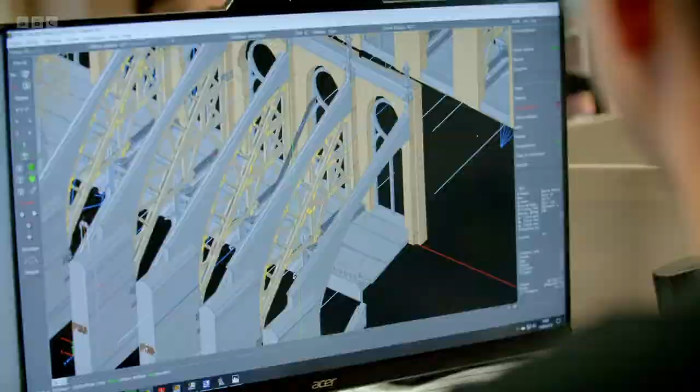But on the 15th of April 2019, disaster strikes. A massive fire rages out of control and tears through the cathedral, leaving it in ruins. Now, a team of master craftspeople and elite engineers battle to save this fragile structure from a catastrophic collapse.

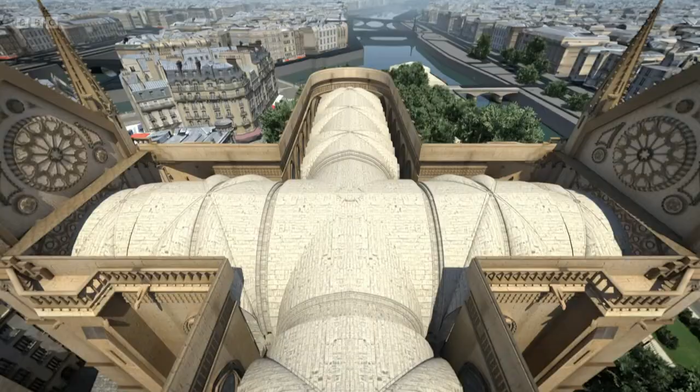The cathedral can hold 9,000 worshippers, and its 33-meter-tall walls contain more than 3,000 square meters of stained glass. The ceiling is a series of domed Gothic vaults that hold up the cathedral from the inside. A complex 500-ton web of timber forms a cross-shaped roof, topped with 1,300 lead tiles, and a 90-meter-tall central spire.

Wrapped around the church are 28 flying buttresses, limestone arches that brace the walls from the outside. And at the front, 2 mighty towers, with 10 massive bronze bells inside, soar over 68 meters into the sky over Paris. The construction took many generations. Architecture was not learned at the university, so the architects and all workers learned mostly on site.

Along the way, there were many setbacks. In 1789, at the height of the French Revolution, anti-Catholic forces destroy parts of the cathedral. A newly secular France leaves Notre Dame in a state of neglect. But when Victor Hugo writes The Hunchback of Notre Dame in 1831, it sparks a £170 million restoration that tops out the cathedral with a new roof and a 750-ton timber and lead spire. And periodic renovations continue to this day.

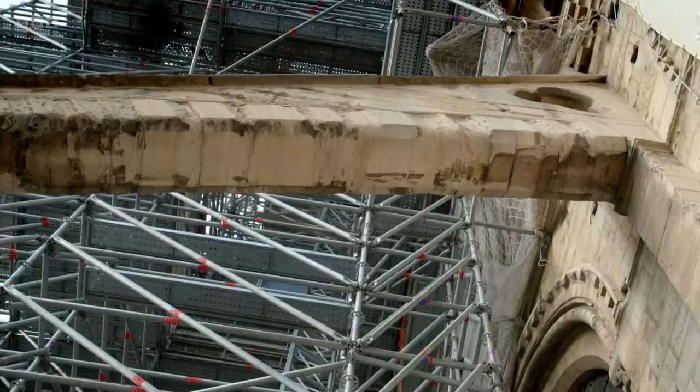On the 15th of April 2019, Notre Dame is wrapped in 500 tons of scaffolding as the cathedral begins a £5 million operation to shore up the spire.

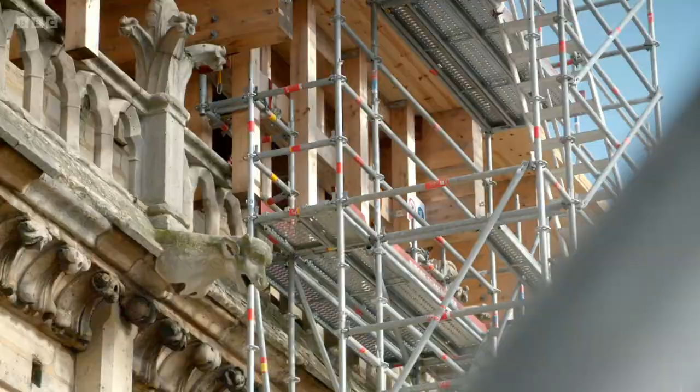Notre Dame's rector, Father Patrick Chauvet, has finished evening worship. His world is about to be turned upside down.

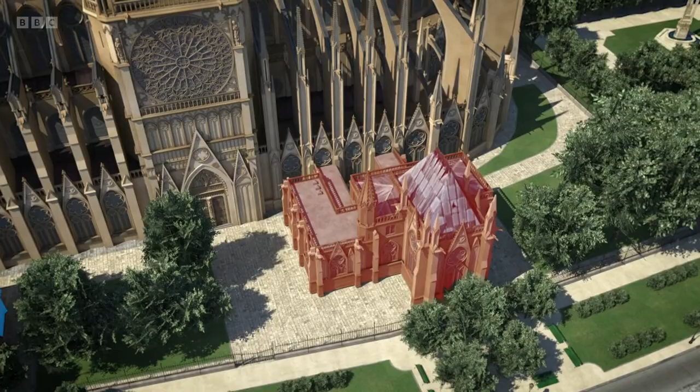At 6:18 p.m., a sensor detects smoke in the medieval roof timbers. The system sends a coded fire alert to the security team. Instead of heading straight for the roof, a guard is dispatched to the sacristy building nearby to check for a fire, but he finds nothing. He climbs up into the church attic, but by the time he gets there, he's too late. The fire has been burning for almost 30 minutes and spread across the roof.

And there was this horrifyingly huge plume of smoke billowing up out of it. It was surreal. I'd never seen anything like that before. You saw the fire trucks come up alongside the cathedral and ladders went up and the hoses came out. You could see that the ladders were just too small for a building of this size, and the hoses were not nearly big enough for this kind of blaze. It was tragic. The resources that were available were not going to be what was needed to bring this thing under control.

A lot of us realized that this fire was just going to ravage the cathedral.

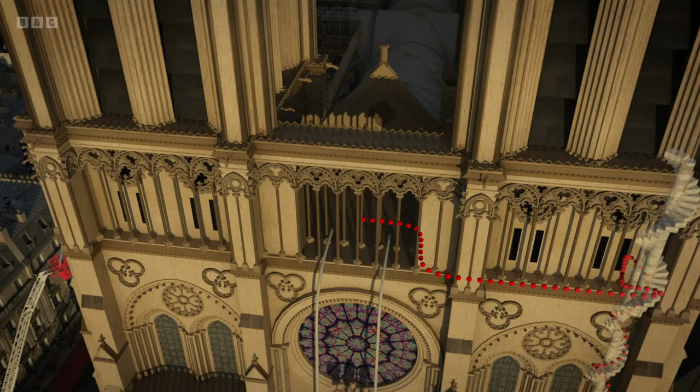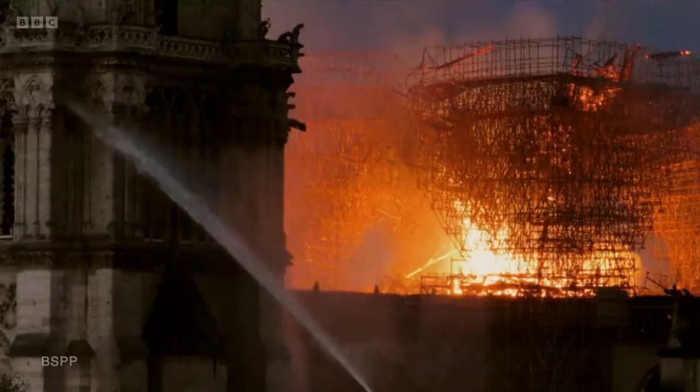And despite their efforts, the timber frame holding the bells has caught fire and could trigger the destruction of the cathedral at any moment. So the team must drag their hoses to the top of the tower and soak the timber frame to prevent the unthinkable. Throughout the night, the fate of Notre Dame hangs in the balance. Eventually, the firefighters get the upper hand. The flames have been beaten back and only glowing embers light up the night sky.

Nobody knows how the fire started. An investigation begins. But for now, the urgent question: how damaged is the structure and can it ever be rebuilt? President Macron pledges to restore the cathedral in 5 years.

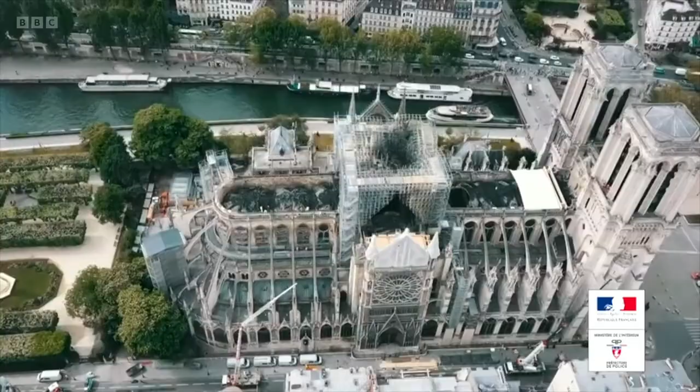Daylight reveals the full extent of the terrible destruction wrought by the fire. The oak roof and spire are completely destroyed. Toxic lead that covered the roof has been sprayed into the air, contaminating the site. Burned roof timbers cover the vaulting. 3 gaping holes in the stone vaults weaken the entire structure. And the 500-ton scorched carcass of scaffolding could collapse at any moment. Something unthinkable to those tasked with preserving France's rich cultural heritage.

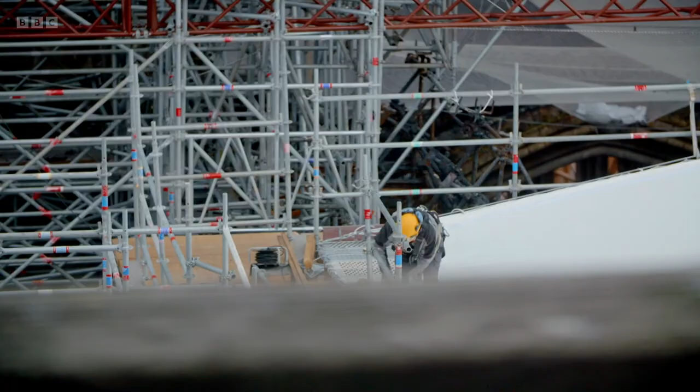Philippe Villeneuve is in charge of historic monuments in France. This is the cathedral that inspired him to become an architect.

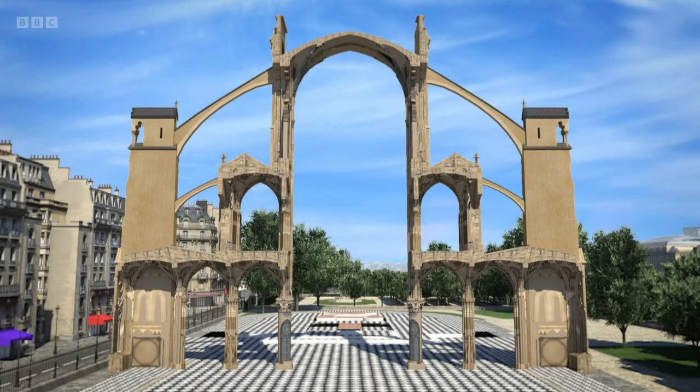The stricken cathedral is a giant house of cards. If the stone vaulting collapses, the weight of the buttresses will push in the 33-meter-high walls, and Notre Dame will be no more.

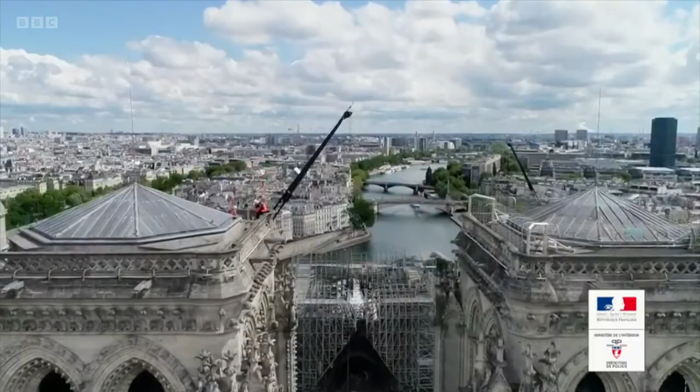There are evacuations like this each week that slow progress.

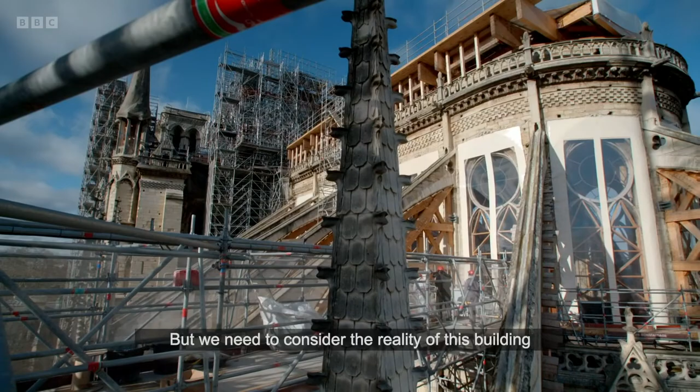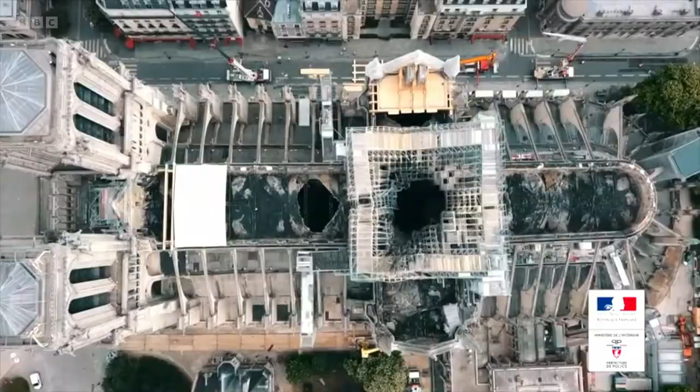To avert a catastrophic collapse, engineers could build a steel skeleton inside the nave to brace the walls. Then, even if the vaulting caves in, the walls of Notre Dame would stay standing. But it's far too dangerous for workers to erect steelwork beneath the compromised structure.

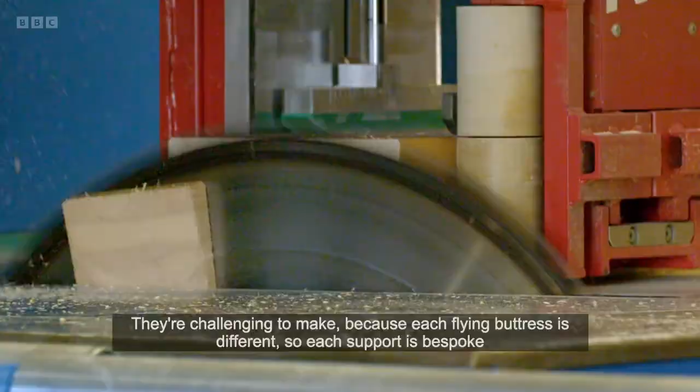Workers at this specialized factory race to cut and assemble around 225 tons of timber to create the massive supports Philippe's team needs to prop up the vaults. It's critical each support fits perfectly beneath each flying buttress to hold its weight.

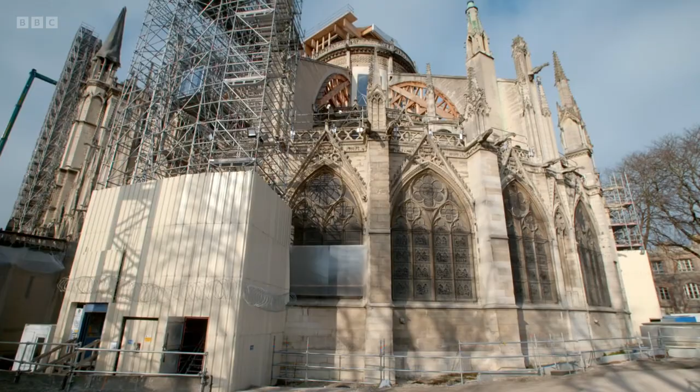Working around and inside this space is a logistical nightmare. 200 tons of lead cladding covered the cathedral roof. This was mostly melted during the fire, and now toxic lead dust covers every surface. The work site is highly contaminated.

Until the site is cleaned, team members must wear full protective clothing to pass into the contaminated zone. When leaving site, they undress, discard all clothing, carefully wash equipment, then shower themselves. Only then can they go back to the clean area, even for a lunch break.

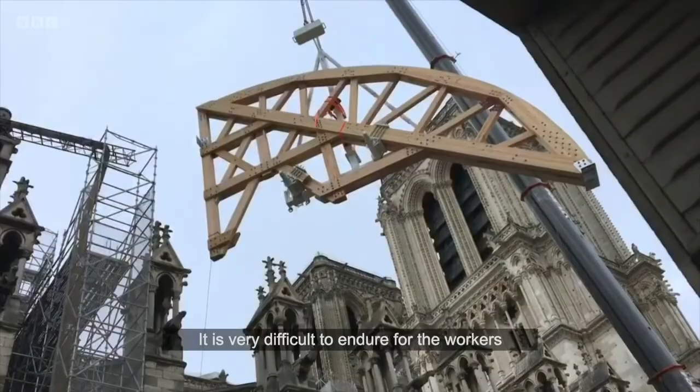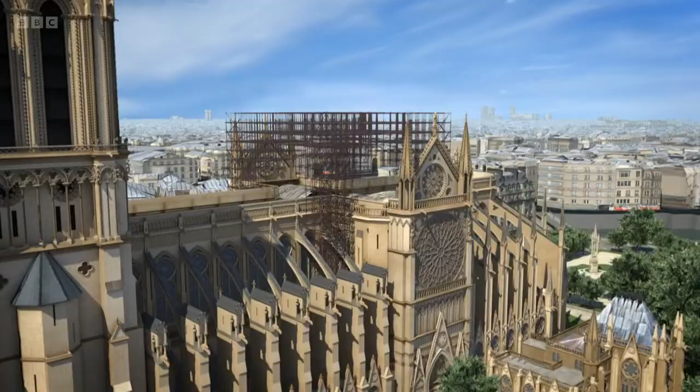But finally, 5 months later, all 28 flying buttresses are locked in place and the walls are safe. Now they can turn to the next challenge. Secure the melted mass of scaffolding that hangs precariously over the cathedral. The scaffold weighs more than a jumbo jet and only rests on 4 spindly legs.

The team plans to wrap 3 massive steel lattice beams around it to tie the fragile upper parts together. Then they'll build more scaffolding either side and lay steel beams across it. This way, workers can get inside the stricken scaffolding to help cut off its 50,000 steel poles, a truly Herculean task.

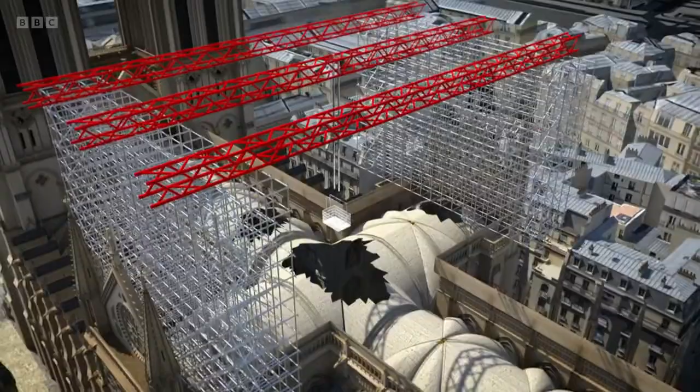Only then can the team put up a temporary roof to protect them from the elements while they rebuild Notre Dame.

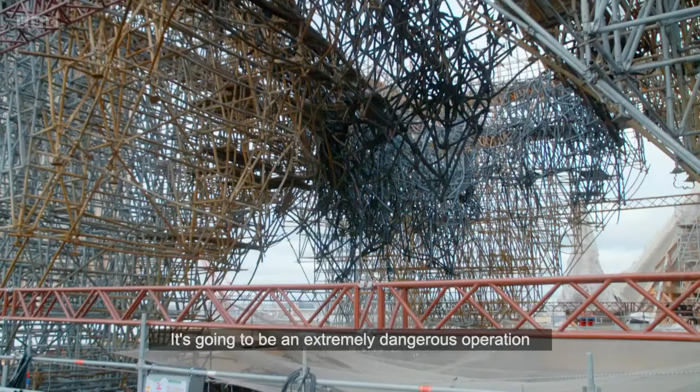While engineers gear up to remove the scaffolding, architect Rémi Fromont and Livio De Luca begin a groundbreaking project that will combine the investigative work with new scientific analysis. Their ambition is to create a data-rich model of Notre Dame, a digital twin.

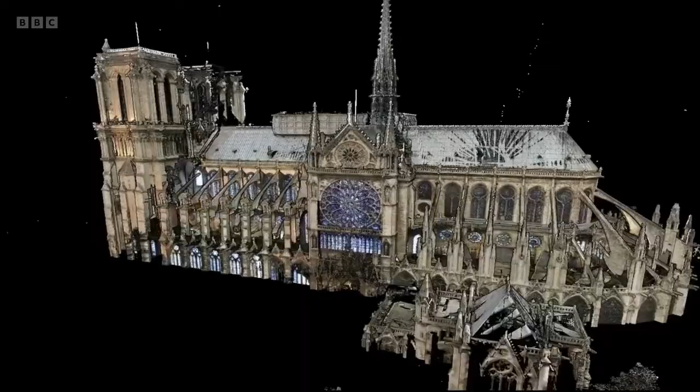The digital twin will embed not only the geometric structure or the visual appearance of the cathedral, but also all the scientific data coming from studies. For example, you can click on a stone, a vault, and access all the information about its physical properties, such as the provenance, but also the mechanical behavior within the entire structure.

This 3D dynamic map will show every stone, timber, and iron nail in the structure, across time, from the 12th century to the present day. This is an unprecedented project. The ambition is to collect all the information from the past to pass it to the future.

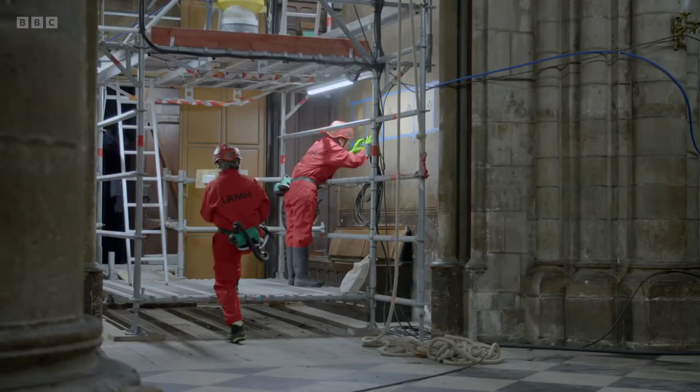There's very little first-hand information about the construction of Notre Dame or the craftspeople who built it. In the wake of the fire, new studies of the cathedral's materials could unlock these secrets. This new data, captured in the digital twin, will provide a blueprint for the restoration and rebuild. Inside Notre Dame, scientists begin to gather data and investigate the damage to treasured statues, murals, and windows.

The cathedral's most fragile wonder, its stained glass, dates back to the 13th century. 36 windows circled the lower level, 42 around the middle level, and 43 around the upper level. The 3 famous rose windows span up to 13 meters in diameter and are made up of over 1,100 panels of beautiful stained glass.

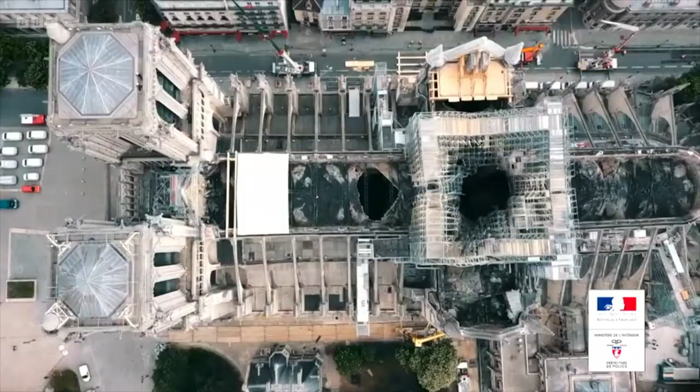But the intense heat from the fire that melted the cathedral's lead-covered roof means that today, much of the remaining glasswork is covered in a layer of toxic lead powder. It was really painful to see the catastrophe on the TV. I was looking to see what's happened around the windows, and it was, of course, totally difficult to have a good idea of what's happened. There is a before and after 15 April for historical monuments, that's for sure.

Glass scientist Claudine Loisel uses a handheld digital microscope to investigate the levels of lead powder on the stained glass. She must then formulate a strategy to clean every single panel. It's a vast decontamination program that will make the glass safe for restorers to begin work. This window is in the back of the cathedral, in the lower level, furthest from the inferno. But it's still badly contaminated.

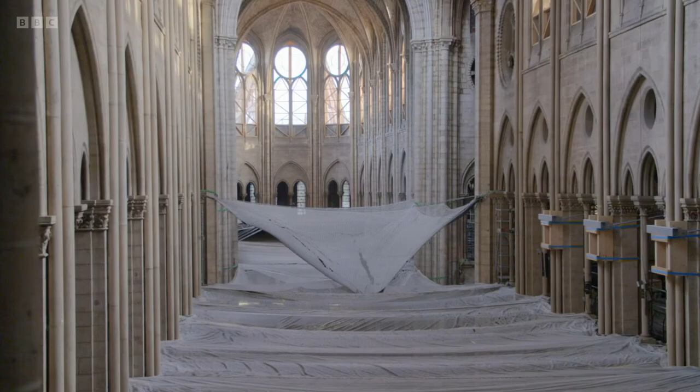Claudine examines deposits from windows around the cathedral. The samples reveal vital clues about the spread of the lead contamination. After the spire fell, the cloud of dust, lead and different particles pushed in the other direction. So we are a little bit more protected in this area. The windows of the upper level in the path of the lead cloud have been most contaminated. The team takes out and transports these panels to this special laboratory, where they experiment with ways to remove the lead.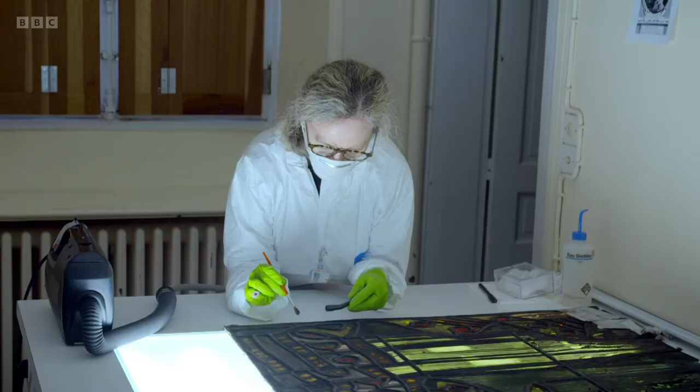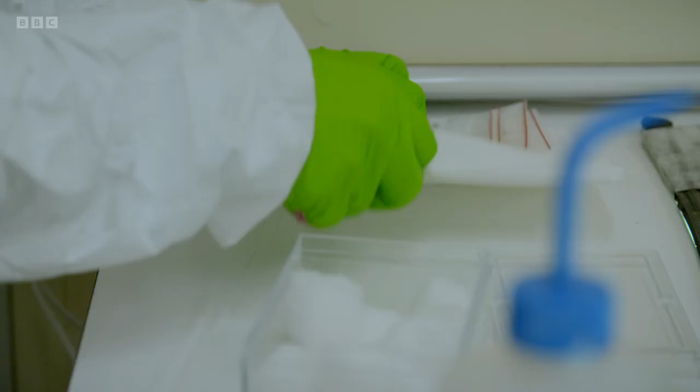First, Claudine uses a precision vacuum cleaner to hoover up the 100 years of dust and most of the lead powder along with it. So this is a good way to protect the conservator. You can control the action, the pressure on the glass and also on the painting. Then she uses water and cotton balls to meticulously remove the last of the lead. Of course, you need scientific evidence that it's working.

Claudine uses X-ray spectroscopy to measure exactly how many wipes it takes to bring the lead down to normal levels. So we can identify each chemical element we have in the material. Too few wipes and the lead will remain. Too many wipes and restoration will take longer than necessary. Okay, now the analysis is finished.

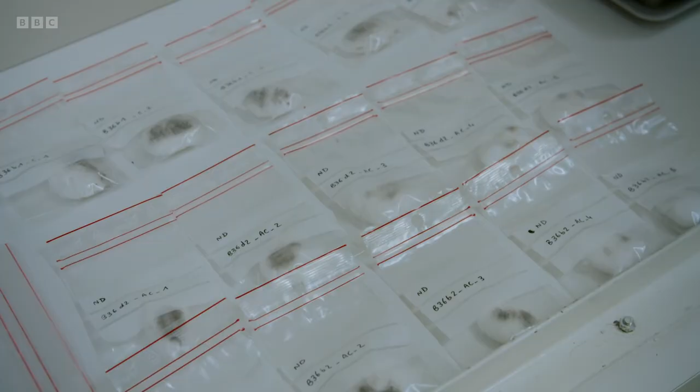After 5 wipes with the distilled water, Claudine checks to see if the glass is decontaminated. Okay, we have different chemical elements, calcium, iron, and if we want to see the lead, there is no lead. After 9 months, we can see a good solution, a good way to clean and to preserve the stained glass windows from Notre Dame.

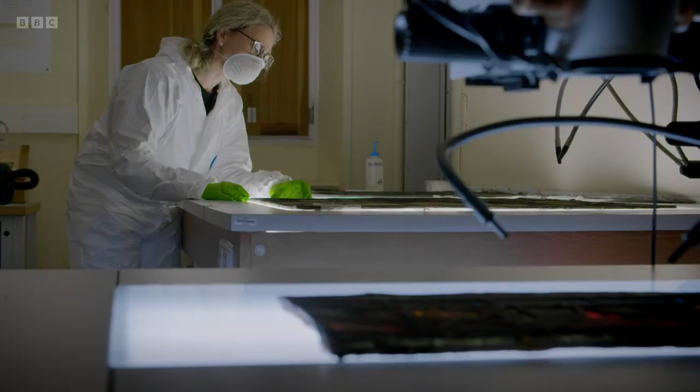The upper-level windows were not only in the path of the lead cloud, but also closest to the inferno. Claudine hunts for hairline cracks caused by thermal shock, the rapid heating and cooling of the glass. This is one window from the choir, and we have 2 panels from the middle of the bay, but here we have a crack.

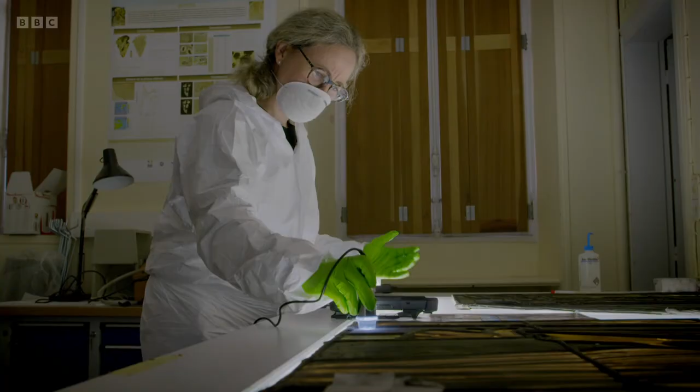The handheld digital microscope helps Claudine see deep into the crack. If it's caused by the fire, it will be clean and fresh. If it's older, it will be full of residue. We can see the well-defined line of the cracks with no residue. So we can say this crack is due to the fire. This is a recent crack, and this is typical thermal shock. It looks like the upper-level stained glass will need to be painstakingly glued back together.

But inside Notre Dame, the lower-level stained glass appears to have survived unscathed. And here we can see we have a good stability and adherence of the painting. So there is absolutely no thermal shock. That's good news for us. On site, the teams of scientists meet the engineers and architects to share their findings.

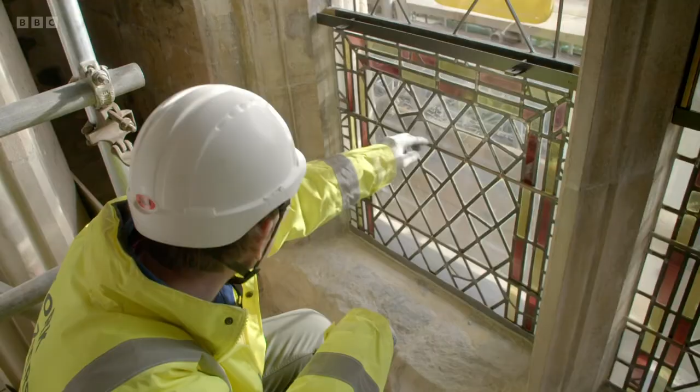We've got glass from the 12th right through to the 18th century in quite significant quantities, and it is really our national treasure house of stained glass. Engineers here are completing a £10 million project to protect York Minster's stained glass from harmful UV rays and the corrosive effects of moisture. In modern stained glass conservation, we're really doing as much as we can to keep both surfaces of the historic stained glass dry and stable, and that's where our ventilated environmental protective glazing comes into play.

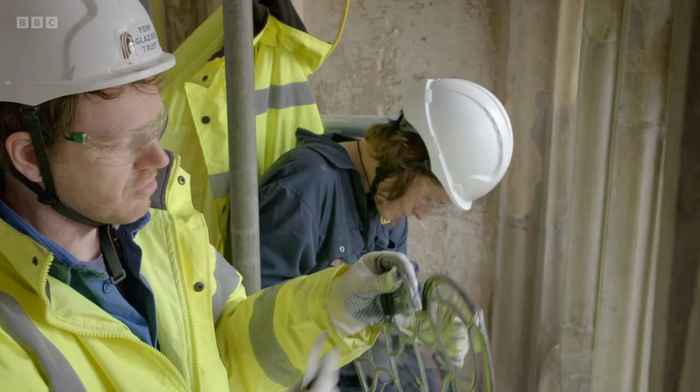Right, I can see that I'm almost in. So I think it's just this last bit here. Matt Nichols is installing this new conservation system. He slots a protective clear glass exterior frame into the window opening. And this goes into the original glazing groove where the medieval glass would have been. This protective glazing prevents corrosive condensation from forming on the 800-year-old stained glass that will sit behind it.

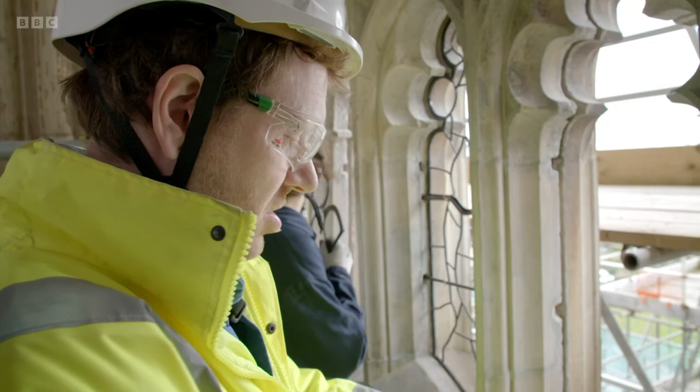The gap created means that there's air circulation running through. And when you've got air circulation, it's regulating the temperature, which means that there's less moisture on the glass. Each frame is custom made and takes great skill to fit. You don't want to make it too small because it's going to obviously slide through. No two windows are going to be the same.

With the outer panel installed, they can reinstate the layer of medieval glass. They're actually in fairly good condition, considering that they're early 13th century. There's always the worry whenever you're handling glass like this, but you just got to make sure that you're really, really careful. There's nothing quite like seeing it with sunlight behind it. When you put it up like this, it's quite magical, isn't it?

Techniques like this offer a glimpse of how scientists like Claudine may eventually preserve Notre Dame's glass. This is the best way to protect stained glass windows, so it will be for sure an option to protect the windows from Notre Dame. By an incredible stroke of luck, the 3 spectacular rose windows of Notre Dame that date from the 13th century survived the fire intact. It was a great relief to see all the panels in place, in good stability, so everything is okay.

Had the vaulting collapsed next to the windows, the glass could have been badly damaged. But luckily, the stone vaulting, which sits just under the timber and lead roof, protected the windows from the inferno above.

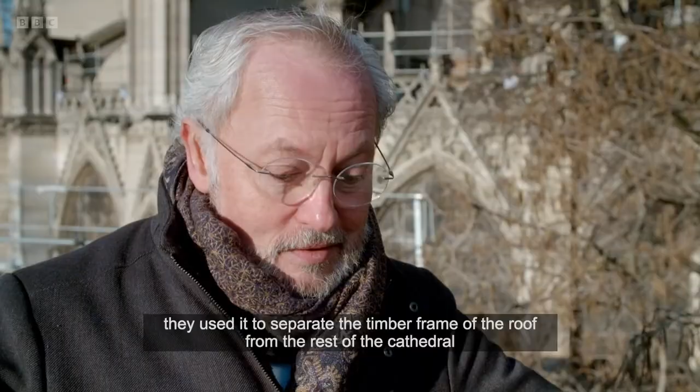The magnificent vaulting was built to be resilient, thanks to precise medieval craftsmanship, using an estimated 800 cubic meters of limestone. The arches work together to support the roof and stabilize the outer walls. But the intense heat from the fire and the collapsing spire took out 15% of the stone vaulting. Today, 3 12-meter wide holes and several smaller gaps mean the vaults could collapse at any moment.

The team collects, stores and catalogues the fallen stone in this tent, located alongside the cathedral. They may be able to use some of this stone to reconstruct the vaults.

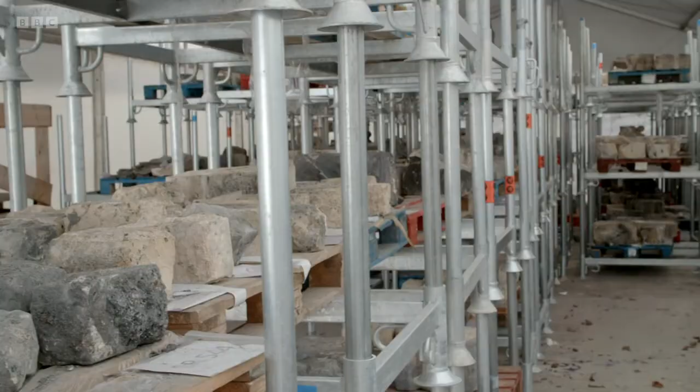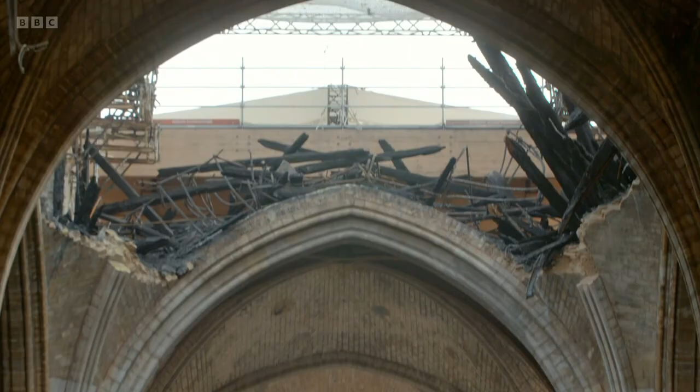But medieval masons never intended the stone to be subject to an 800-degree inferno, then soaked with tons of water. Now, without a roof to protect it, areas of the vaulting are exposed to the elements. Stone scientist Jean-Didier Mertz forces mercury at high pressure through samples of the damaged vaulting to calculate the porosity of the stones. This tells him how sponge-like the stonework has become 1 year on from the fire.

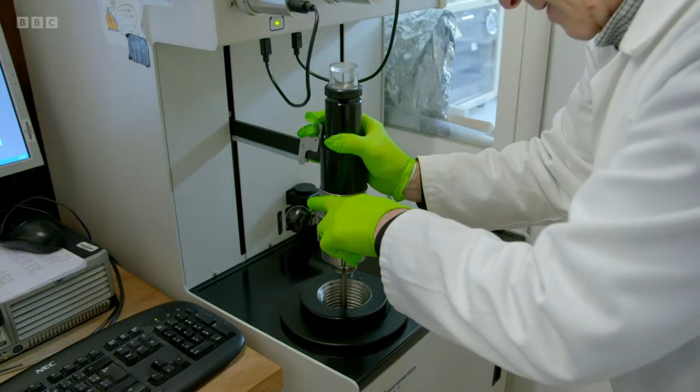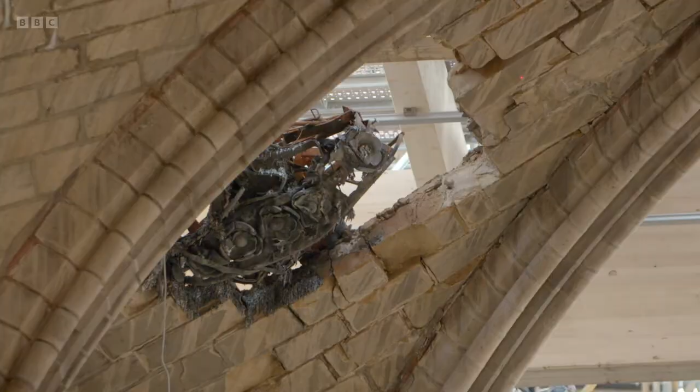The damage produced some cracks due to the fire. With these cracks, it is possible for the water to go in and to fill all the cracks. Jean-Didier confirms the surface of the vaulting stones are covered with micro-cracks, dramatically increasing the porosity. Greater porosity means the vaulting can absorb more water than they thought, potentially swelling the blocks. As the blocks dry, they then shrink.

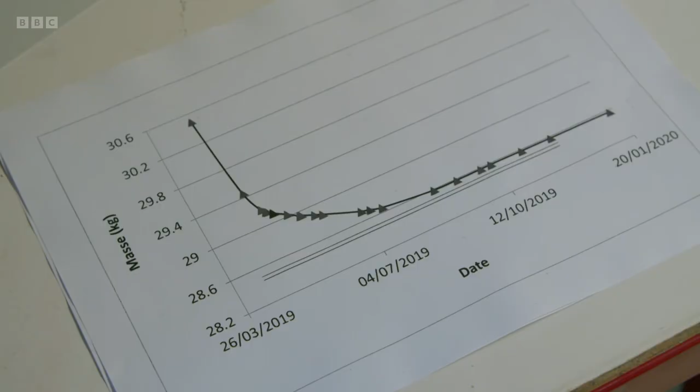Jean-Didier has dried this vaulting stone under lab conditions. He knows the block holds 1 kilo of water and takes 6 months to fully dry. The vault of Notre Dame, it is not exactly the same because the cathedral is not completely sealed, and we have new rainwater and the repeated cycle of swelling and shrinkage. It is a real decay. It is a weathering of the material.

Even if some fallen vaulting stone can be reused, it's clear they'll also need to source new stone.

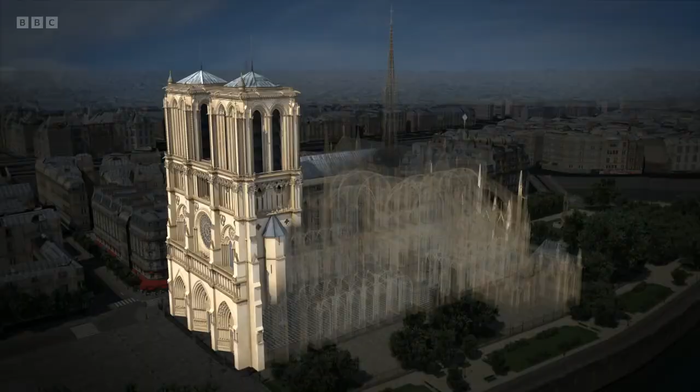Notre Dame is made up of many different types of limestone. Medieval masons chose hard limestone for the towers, pillars and outer walls to build tall and hold up the roof. For the sculptures, they chose dense, fine-grained limestone that can be carved with great detail. And for the vaults, they selected softer, more porous limestone that's light but strong. If the team rebuilding the vaults picks a limestone that is too heavy, the new vaults may not last as long as they should.

Geologist Lise Leroux investigates what quarry this stone came from. We have some blocks coming from the collapse of the vault for a study. This detective work will help the team source replacement stone that shares identical mechanical properties. We have to verify. The fallen vaulting stone contains a rare microfossil called Orbitolites complanatus, a kind of plankton. Fossils like this are found in just one layer of rock. This will make sourcing new stone of the same type even trickier. Can they use this geological fingerprint to discover the original source of the vaulting stone?

Impressionnant. To find out, Lise and fellow Notre Dame scientist Claudine Loisel ventured deep beneath Paris. Hidden under the city's streets is a rich source of limestone, a vast labyrinth of quarry tunnels. Lise and Claudine enter this maze, 2 miles south of Notre Dame, in the famous catacombs.

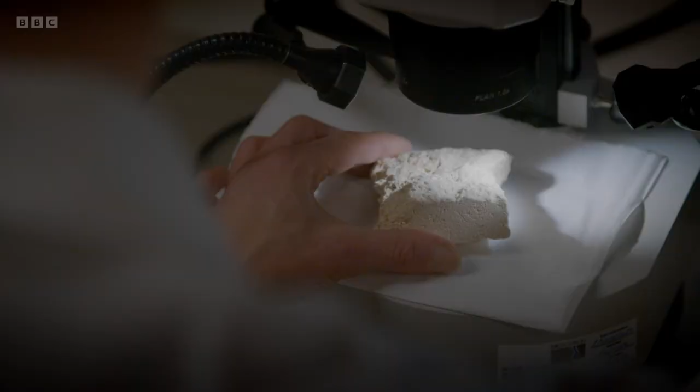So back in the lab, she takes a closer look at a sample of limestone from the lower level of the quarry. These little fossils, this one, this one, this one, are in fact some planktonic fossils, which are called foraminifera. It's not the fossil signature she's looking for. But then...

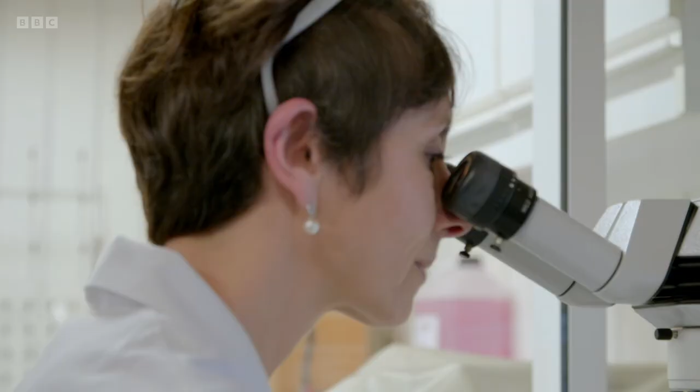Oh! This one here is Orbitolites complanatus. This little planktonic fossil is a dating fossil which matches with the stone coming from the vault. It's a stratigraphic indicator, characteristic of the Middle Lutetian, which is a geological age of deposit.

Lise confirms the origin of the Notre Dame vaulting stone. It's quarried from the deepest seams of limestone beneath Paris. Conclusive. But what about the harder limestone, used by medieval masons to build Notre Dame's load-bearing pillars and arches? Another microfossil signature confirms the origin of this type as well.

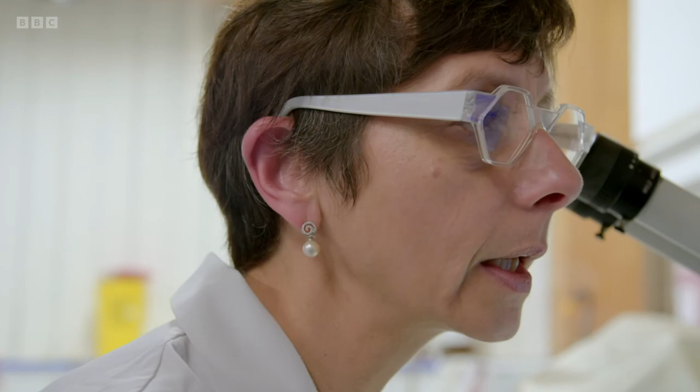The arches are built with a hard stone, with a resistant stone to support the vault. And the vault in itself is logically constructed with a lighter, more porous stone. And in the quarry located in Paris, we have these two kinds of stone. Medieval masons knew exactly how to exploit the varying mechanical properties of the limestone for Notre Dame. Knowledge passed down through the generations.

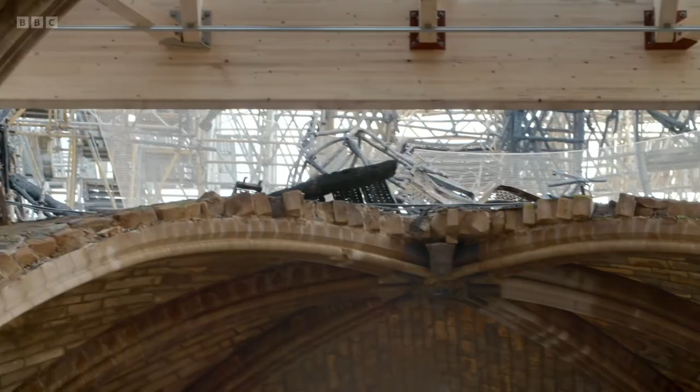Sourcing more of the correct stone won't be easy. The old quarries are no longer active. But engineers now know what limestone to look for. This will help them find a match in quarries outside Paris. Stone is not the only raw material that will need to be replaced as engineers reconstruct Notre Dame. The timber roof was also a medieval wonder.

It was constructed from 700 cubic meters of timber cut from 52 acres of oak. That's approximately 1,300 trees. For this reason, it was known as the forest. Every single oak in Notre Dame's forest was hand-picked for the physical properties needed in the roof structure, from dense straight oak for pillars to curved oak for support arches. But the fire consumed every beam in the forest. Today, this intricate 500-ton timber jigsaw lies in ruins.

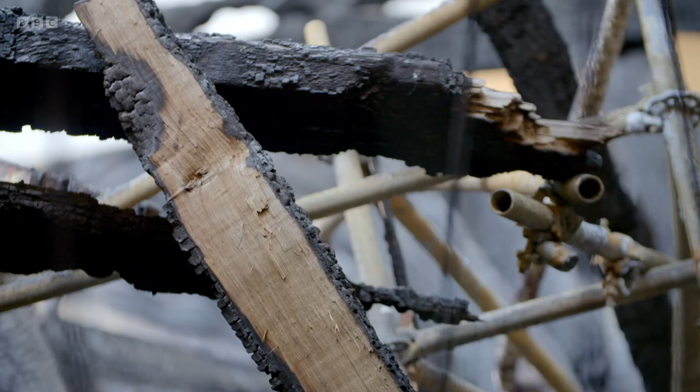Over 50 tons of the precious roof timber lie precariously on top of the vaults. Despite the destruction, every single beam holds the history of Notre Dame. It has deep archaeological value. It's vital that workers forensically record the position where each beam fell before they remove them. This helps them determine where it originally sat in the roof structure. These highly trained rope access technicians catalogue and clear the charred timber on the vaults.

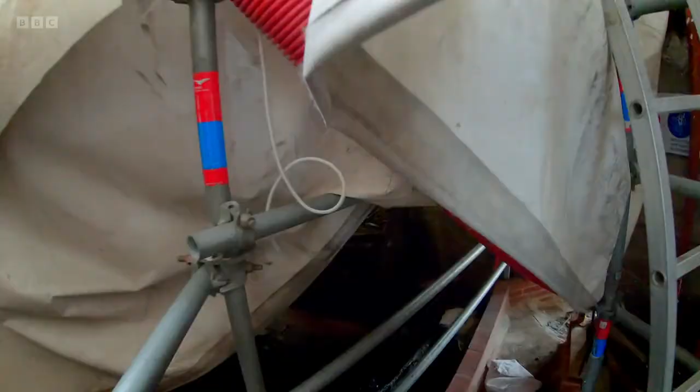D'accord. Zone souillée. It's not possible to walk on the vault. The structure is very precarious. They needed to create a way to access with ropes. We need to wear a special mask because of the lead dust that we might inhale. We label the timbers and we mark them with a code that the architects will be able to identify.

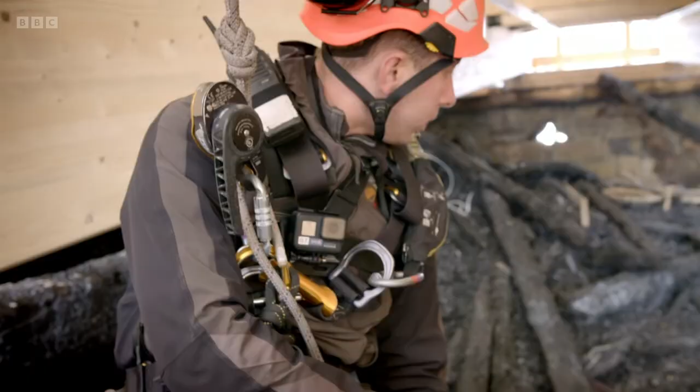The team has their work cut out. There are thousands of separate pieces of timber to catalogue. We have a lot of work to do. That's why we're working day and night. They've already extracted around 4,000 pieces. Timber scientist Catherine Lavier begins painstaking detective work to reveal how Notre Dame's vast forest was originally assembled and could be rebuilt today.

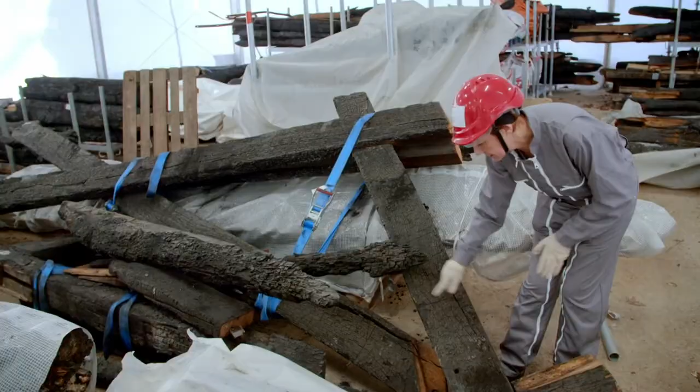Some pieces were very well preserved because, as you see here, with different faces, and another piece of wood is coming here with a wooden joint here to assemble them. And it's rather typical of the medieval period. And here you have a mark of carpenters. So they are sure that this piece with this piece are together. It's very important for carpenters. They prepare the wood on the ground, and after that they go to the roof and reassemble again.

Every carpenter has his own way to mark, but in general it's based on the Roman numbers, but we can find some differences between teams of carpenters. We were very surprised to find that because I thought everything would be destroyed, and finally not.

The tree rings of the timbers conceal further clues. Each ring represents 1 year of growth, a time capsule of information about the life of the tree in that year. Catherine analyzes core samples from Notre Dame's roof trusses. She measures each ring to reveal the secret story of the very oak trees the structure was made from.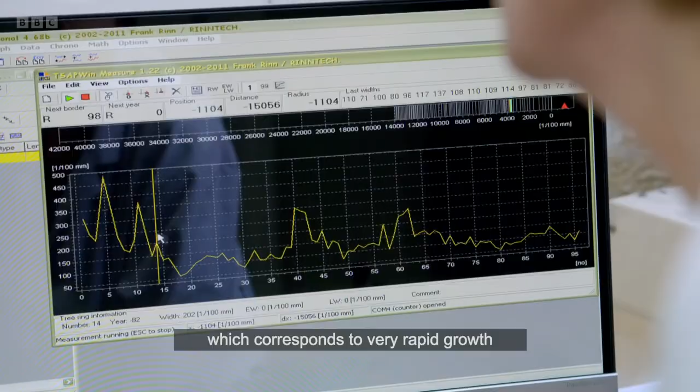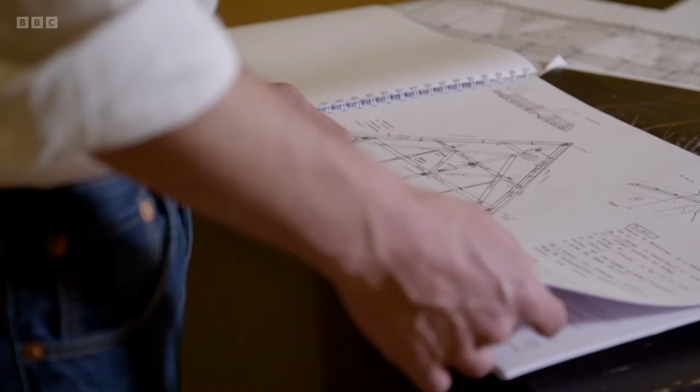Catherine is gaining new insight into the types of trees best suited to rebuild the complex forest of Notre Dame. This extraordinary challenge will require around 1,300 oak trees, craftspeople versed in the lost art of medieval carpentry practices, and a blueprint for possibly the most complex timber structure in Europe. The one person who may possess the key to unlock the lost forest's geometrical secrets is architect Rémi Fromont. In 2014, Rémi spent the entire year mapping every inch of the timber.

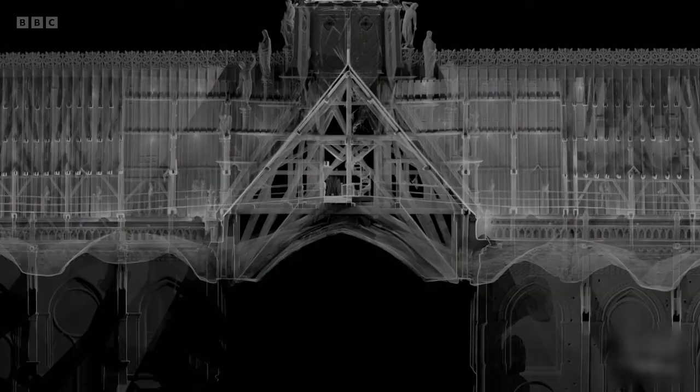In 2016, researchers used this same technology to create a full point cloud of Notre Dame's lost timber roof structure. This remarkable 3D scan will combine with Rémi's 2014 survey in Livio's digital twin for Notre Dame. What we are producing today will probably be the information usable for the next generations. The team now has the data they need to rebuild the timber roof with the exact same geometry. And the 500 tons of new oak needed could come from forests like this.

Almost a third of France is covered with forest. Oak was a vital strategic resource throughout the Middle Ages and the Renaissance. Vast forests were needed to build cities and expand navies. Felling and carving oak for Notre Dame's roof requires carpenters skilled in using medieval tools and techniques, like this team who keeps the old ways alive to this day.

We rebuild buildings using only hand tools and no power tools at all. Using this kind of tool, you don't apply your vision on the tree. You have your work influenced by the shape of the tree itself. Today, carpenter Léo Rousseau has the honor of felling his first tree using techniques from the Middle Ages. Yeah, I guess like everything takes practice. You don't have to go to the sports room at night.

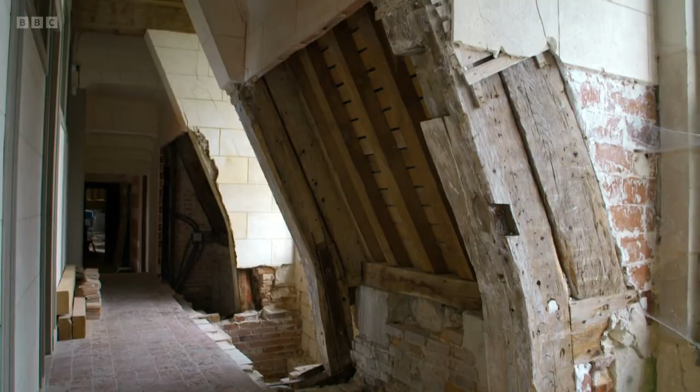The chateau has seen better days. The curved beams that hold up the roof are close to collapse and must be replaced.

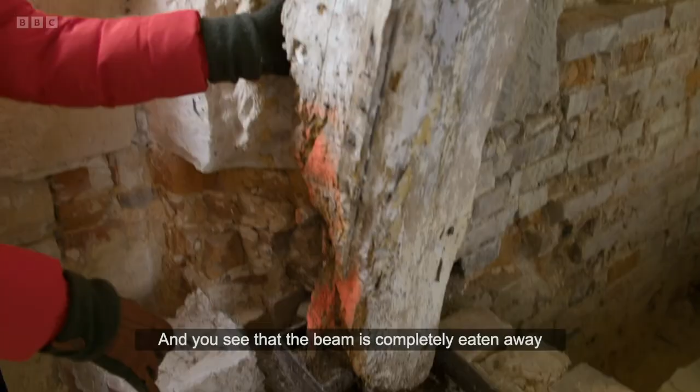Rongés par les champignons. The carpenters here face many of the same challenges that Notre Dame restorers will need to overcome when they rebuild the cathedral's lost forest. The timber has been chosen so the curve of the grain perfectly matches the curve of the new beam.

If you get a straight tree, which has a straight grain, and if you cut a curved piece of wood inside of this, so here is the fiber, so it can break right there. But if you take the tree that's curved, the fiber is like this. So it cannot break. You keep all of the structural strength of the tree.

They use an original beam to produce a template and mark out the new beam on the oak.

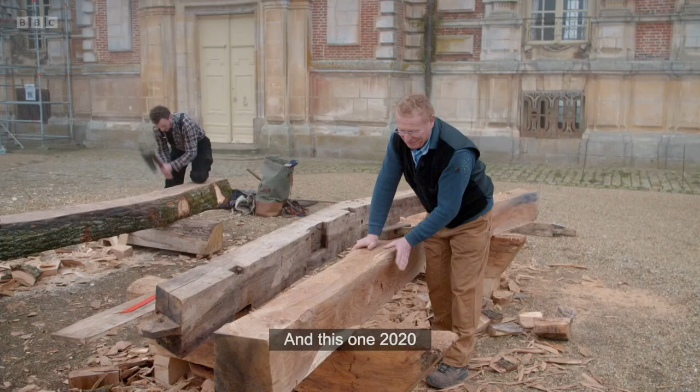Just like the Notre Dame beams, the chateau's original beam holds messages from the old carpenters.

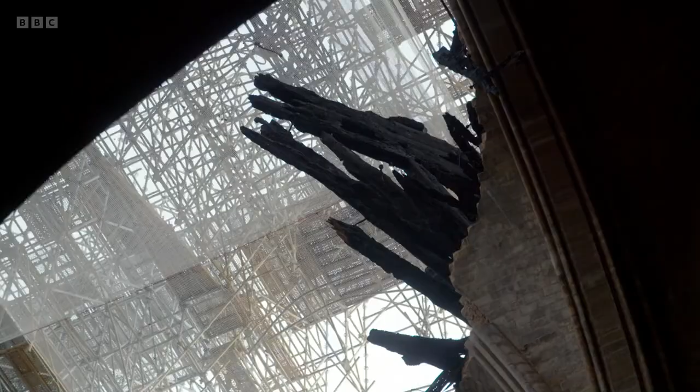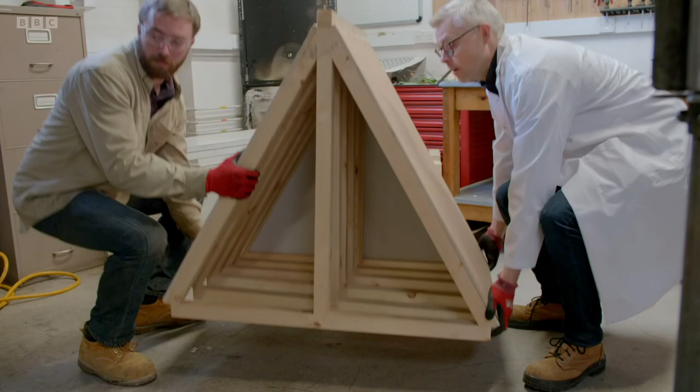While the architects consider options for rebuilding the roof, they must also work out what innovations to engineer into the structure to safeguard it against future fires. Scientists here at the University of Edinburgh's School of Engineering use scale models to investigate how fires spread through timber structures, like the forest of Notre Dame.

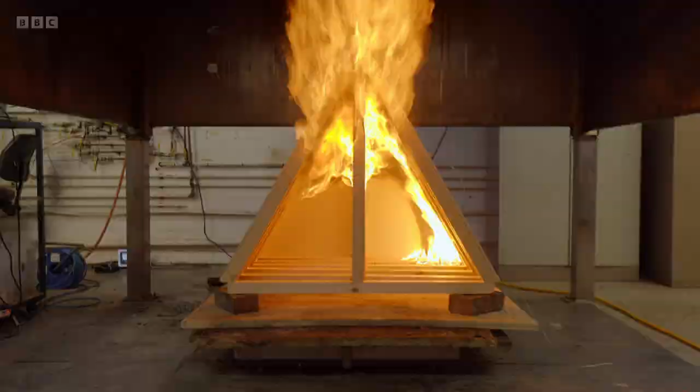Our job is to understand the underlying physics and then to use our understanding of the physics to create strategies by which people can be more safe and assets can be more safe from fire. As Luke ignites a single beam in this model of a timber roof structure, ignition! It becomes clear how quickly the energy radiates to the timber beam alongside until it too catches fire. This phenomenon is called re-radiation.

In a structure like a roof at Notre Dame, what we had is a collection of timber members in a nice pattern, all kind of looking at each other as they burn. And the fact that they're looking at each other, they're radiating at each other, is what causes the fire to grow and escalate in such a dramatic way. If you create a gap or a fire break within your network of timber elements, you can prevent the combustion from occurring on the far side of the fire break.

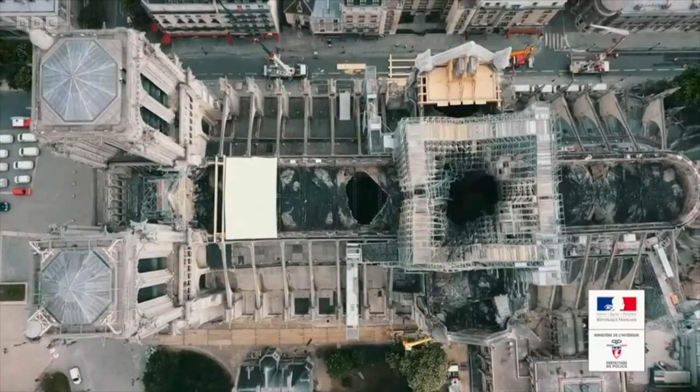To stop the spread of fires like this, today, engineers build fire-separating partitions into the roofs of historic buildings. These firewalls are erected inside the roof of York Minster. In the event of a fire, they should prevent the re-radiation and transfer of energy. Innovations like this could help safeguard Notre Dame's new roof against future threats.

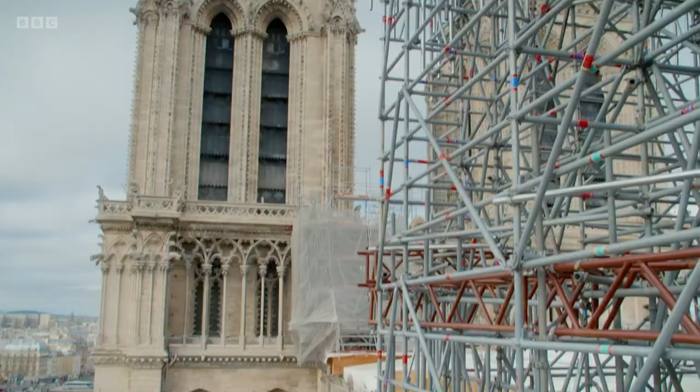One year after the fire that ravaged Notre Dame Cathedral, investigators have still not pinpointed the cause of the blaze, and immense challenges and uncertainties still lie ahead. The building is not yet out of danger. Over the next 12 months, engineers must remove the melted scaffolding and seal the cathedral roof to make it watertight. Then they can stabilize the weakened vaulting. It's a monumental feat, and rebuilding the entire cathedral could take much longer than the 5 years decreed by President Macron.

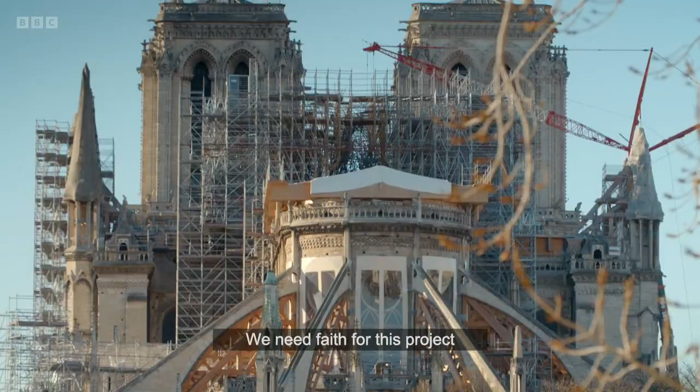Architects around the world have unleashed their imagination to submit grand plans for what the new spire above Notre Dame could look like. From mirrored roofs with kaleidoscopic pinnacles and vast solar panels powering nearby buildings, to stained glass edifices that will light up the Paris skyline.

However Notre Dame is rebuilt, the unique collaboration of architects and scientists is rewriting how we understand the very fabric of this magnificent cathedral. I think the fire in some ways helped remind a lot of people what an important part of our shared history and shared culture this is. Soon, a complete digital twin of Notre Dame should allow future generations of craftspeople to maintain, protect, and faithfully rebuild Notre Dame as many times as necessary.